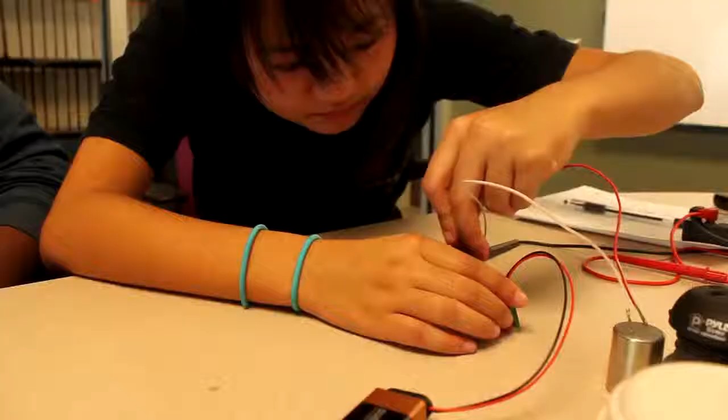I wanted to be part of a team who was changing technology towards something that people have never heard of or seen before. I wanted to try something new. Wanted to achieve the unachievable. I wanted to do something that had never been done before. I wanted to set new standards. I wanted to be able to leave something extraordinary behind at CAM. I joined EDD because I wanted to produce something that hasn't been produced before.

Project Morpheus was tasked to us by the CARPA Authority in August, and it's a year-long project that spans all the way until June. What the task involves is we, as Delta Technologies, must create a 6-kilogram polymorphic robot that can transform into different shapes, kind of like Transformers. Each configuration of the robot will perform a task of value, and each morph has a different point value assigned, as does each task. We as a company are responsible for developing from scratch what each of these morphs and tasks are going to be.

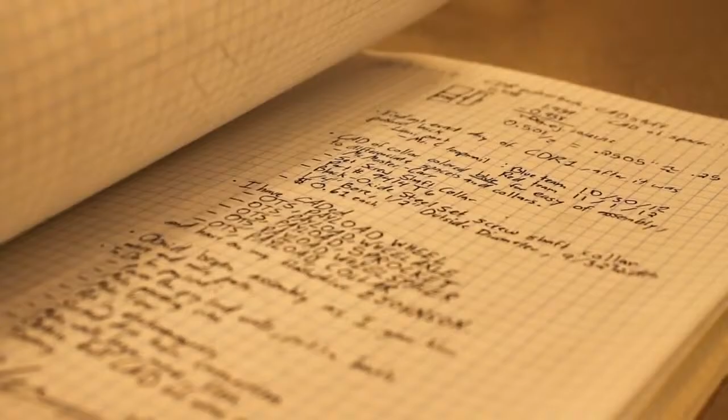Morphing robots is something you only really hear about in the movies. It's very unorthodox as far as I know in engineering. Just the fact that this project was taking everyone in EDD way outside of the box was something that really appealed to me.

It forces us to think outside the box because we have to handle everything literally from the ground up. We have to come up with a concept from scratch, something we've never done before, research it, and make it function properly.

One of the hardest parts I think we had as a team was actually coming up with our final design. I know we were deliberating till the very last moment. I think we left 3 weeks to actually create our entire POC document, as well as create our presentation. It's very difficult when you have 17 people with a lot of differing opinions, most of which are entirely valid, so there's a lot of arguments that have to go into this kind of thing.

It's very important that you come up with something everyone actually really likes, because when it's something everyone likes and is excited about and wants to create, it makes it a lot easier to motivate them to contribute and be a big part of the project. And it's important that everyone gets to do something extraordinary. At least that seems to be the motto of this class.

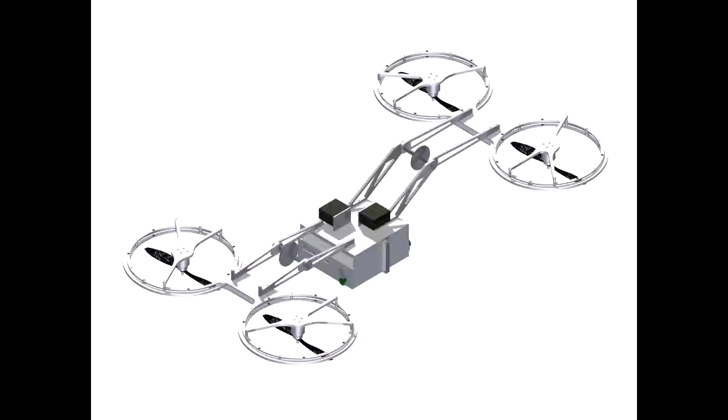So originally we set out our goals of what we wanted the robot to do, but then we went into designing how we essentially wanted to approach those, and we went through many different designs to get there, like going through water, going through air, and all these different possibilities. Just deciding how we want to do it and why we wanted this instead of some other method was a very long process and very difficult to actually set what we wanted to do.

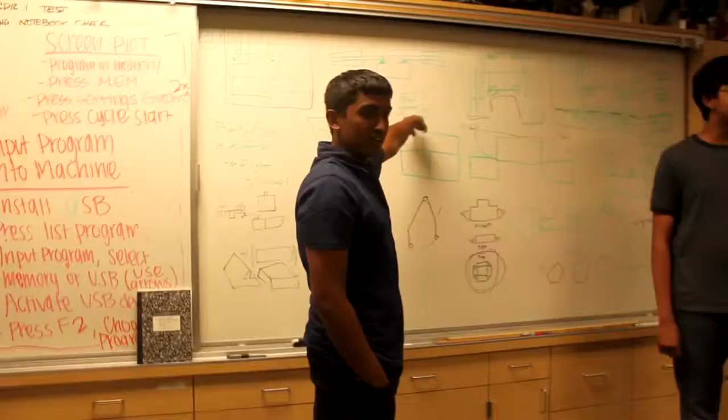Okay, so the first thing I noticed is this detachable payload seems to be the source of all of our problems, or most of our problems, because all of this stemmed from having this detachable payload. The biggest problem was that we spent a lot of time on our first design trying to choose between detaching and not detaching, and the reason the design doesn't fit morphs is because it has a payload that detaches.

Now I hear you guys, and I understand. The original design might not work because of the weight constraint. We planned it out, and you guys, we did the math, and there's a good chance it won't work. But have we really exhausted all possibilities of it? Have we really designed to the fullest extent to see where can we cut every kilogram, every gram we possibly can, to maybe get a design that'll work without the detachable payload?

One of the troubles we came up with was that so many of us came up with so many designs that it was very difficult to choose from, and that pushed back our time schedule. Procrastination between choosing a design was a really big issue for us.

What I see we're doing now is just adding a couple of new things that might not be relevant to what we're trying to complete in that form. The only reason we would try to morph in a complicated way is to try to complete a task more efficiently through that morph.

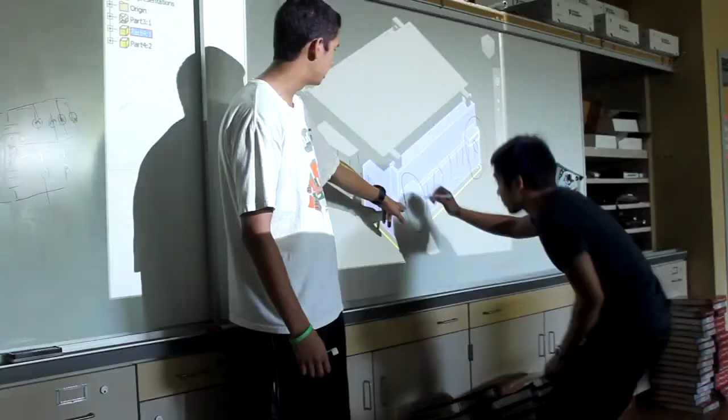The wheel is touching the ground past the treads, and then if you rotate it out, the treads are on the ground. So being able to go from drive to flight to another drive state is very unique and different from any other robot I've seen.

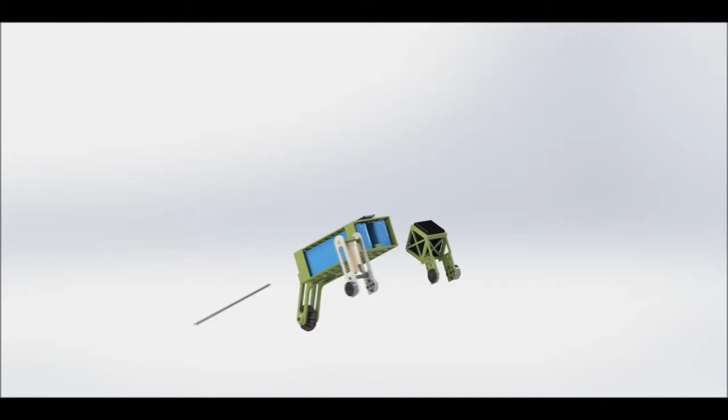In the end, we decided to use a Y6 configuration. We picked the Y6 because we wanted to try something extraordinary: lifting a 6-kilogram robot, which under the circumstances is very difficult due to the size constraints on our rotors because of the shroud. It made it very difficult to provide enough lift to fly this robot stably so it could be controlled.

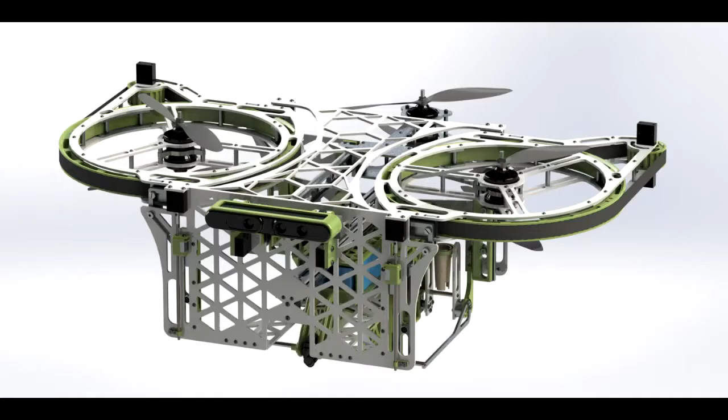Well, it's close to straight.

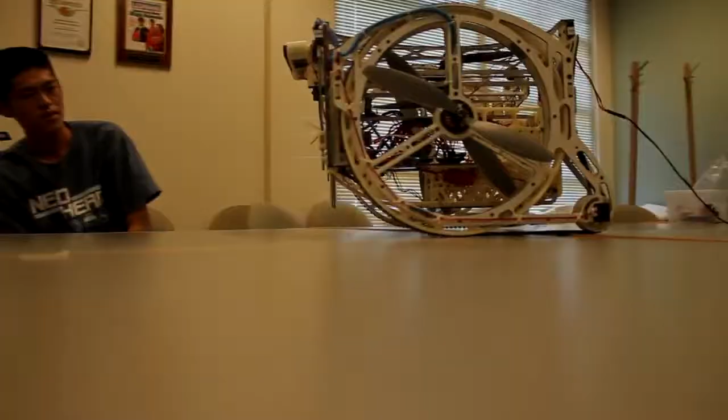Testing the robot was very tricky because we had different subsystems, but we separated into different teams, and each team designed its own test for the robot. For example, in the aerial reconnaissance unit, the team designed a test to see if the robot can lift a certain amount of grams, or even if the robot can fly.

On top of the motor. Go, Michael, go.

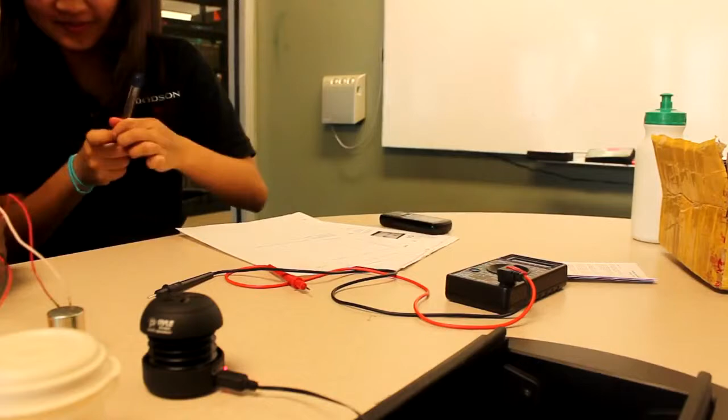During the research and development portion of our project, we were deciding how we were going to sense mines. To do this, we decided to use a device called a geophone. It works by sensing vibrations coming from around it to understand the intensity of the vibrations and where they're coming from. One of the problems we faced was how to interface this with our robotic design.

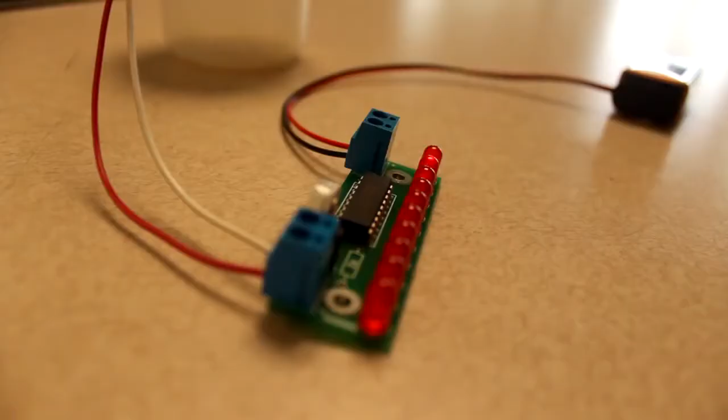To help with this, I researched how the geophones worked and under what circumstances they could be used. I contacted a University of Mississippi professor, Dr. Sabatier. He was a great help because he called a lot, emailed, told us what was going wrong, how to fix it, and the kinds of things we could use to make the system work. He even purchased our geophone kit in order to run his own tests to help us better prepare for our challenge.

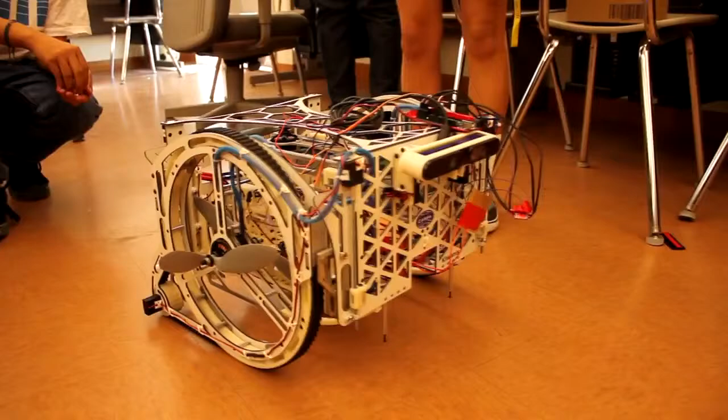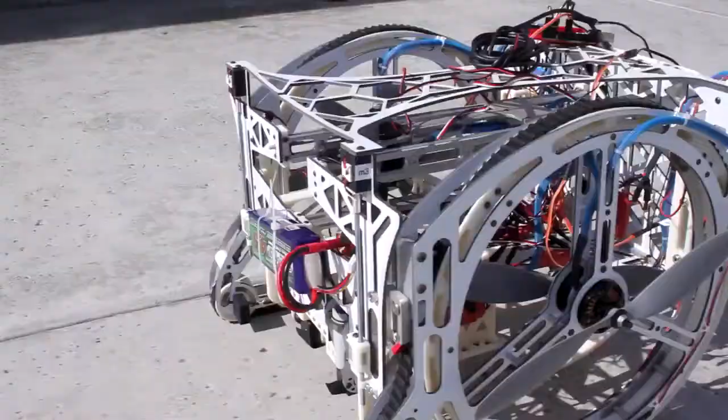It's going straight. We tested a drive by placing the robot on the ground and seeing how far and how fast it would travel. The robot did stall occasionally, but we were able to sort that out, and in the end the robot ran just fine.

That first day, when we said we were going to do it, we've done it pretty much. This advanced class, you guys have done a better job than pretty much any other class before you, and I'm really proud of that. No matter what happens today, no matter how this turns out, I'm extremely proud of each and every one of you for the effort you put in and the dedication you've shown. You have done what I don't believe any other high school in the country has done. I want you to be proud of that, and I want you to showcase it today. Okay? So, do it.

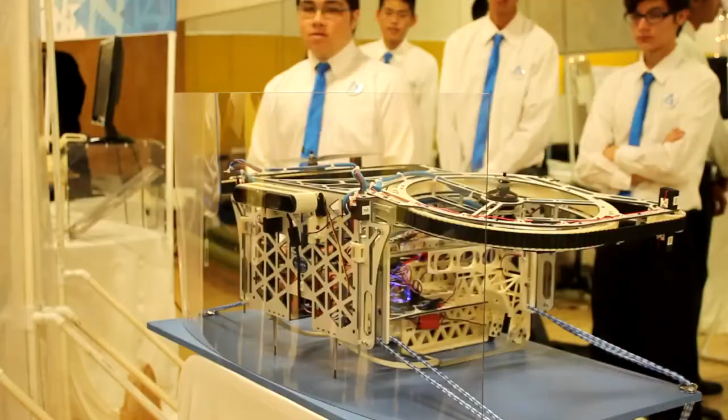Make sure that we can get everything we can get done in class: use of the machines, use of the mills, printing, whatever is done in class. At home it's more like chatting and whatnot, so we keep a lot of our class times and class discussions when we meet. We really figured out how to make meetings run smoothly and get the biggest work out of our time.

This is Eric Johnson, our most avid documenter. We have two engineering notebooks from him. He takes notes of everything. We also go through the technical data package, and this includes basically everything you need to build our robot, so you can take this and fabricate it. This is drawn to actual industry standard ASME Y14.5. We spent a lot of time on that.

I learned that teamwork is essential in order to get a huge task like this done.

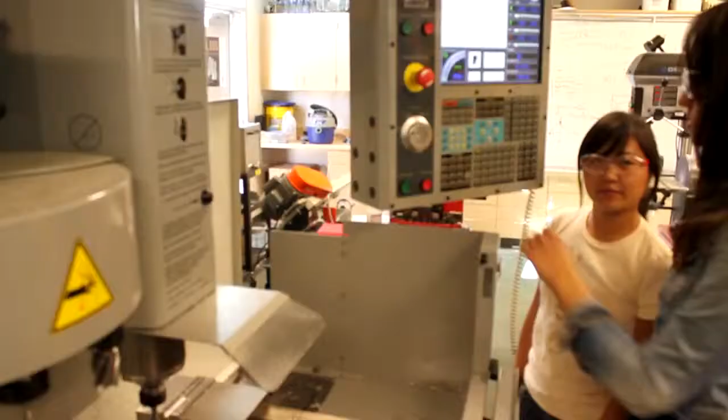As a software engineer at Delta Tech, I learned certain programming from the head engineer, or head programming engineer, and also how to work as a team. I learned how to manage people with different skill sets, providing mentorship for those who didn't know as much as others, and implementing them into creating a design that everybody on the team agreed with.

I learned to be faithful with that which exists within yourself.